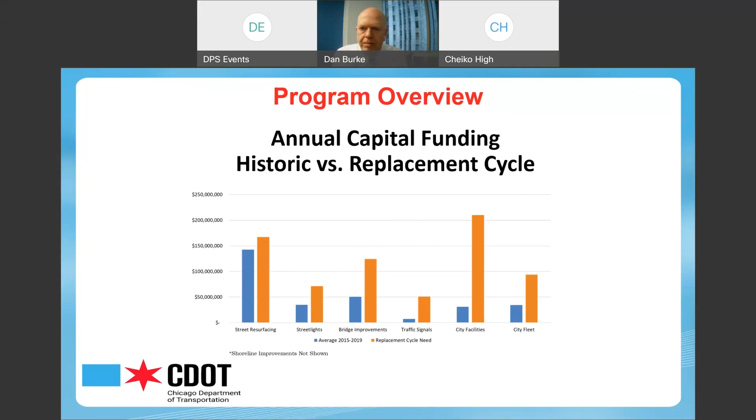Program overview: on a high level, this is the cost, the orange is the cost of what the expenditures need to be to maintain all of our assets. You pick the category: street resurfacing, street lights, bridge improvements, traffic signals, city facilities, or city fleet. The blue has been the city expenditures from 2015 to 2019. So you can see really quickly we were underspending in a whole lot of categories. But I'm really happy to say there's been a lot of movement on that front.

The Chicago Works $4.4 billion infrastructure bill: the first $1.4 billion of that bill passed City Council in November of 2021. I can't say enough about the leadership of Mayor Lightfoot taking that bill through council in the middle of a pandemic to address these issues and to enable us to do our jobs and really address some of these longstanding funding deficiencies.

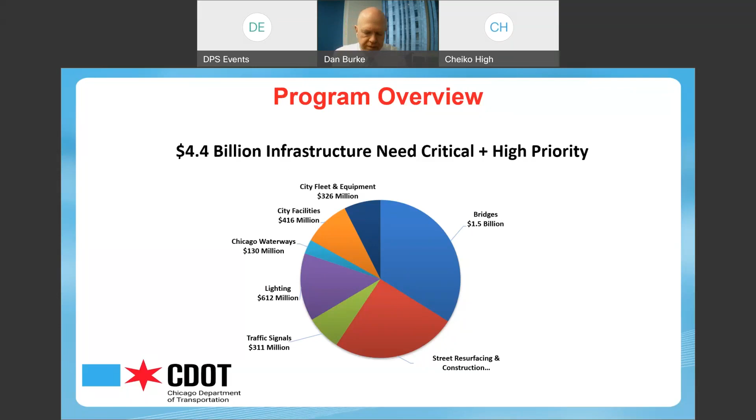The new 5-year Chicago Works plan is a $3.7 billion plan with $1.4 billion approved for years 1 and 2. It's need-based, data-driven infrastructure, facilities, fleet management — not just CDOT, but we're a big portion of it. We're also putting a lot of emphasis on economic development and neighborhood revitalization, and also modernization, maintenance, and future-proofing things.

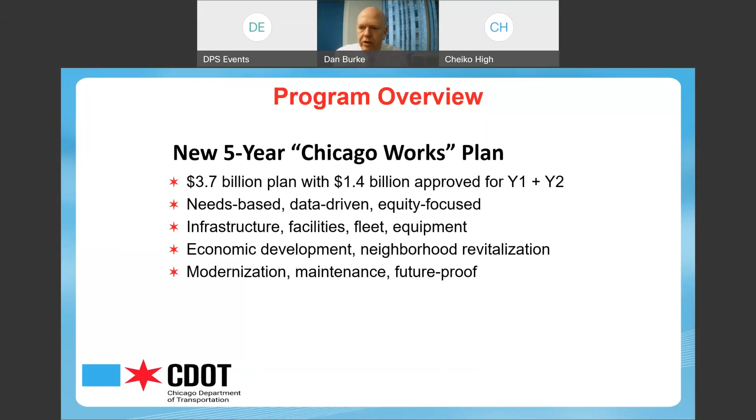Contracting opportunities, I think we're all here today to hear about: street reconstruction and resurfacing, transit, streetscapes, bridge reconstruction, engineering services, whether planning, design, or construction management.

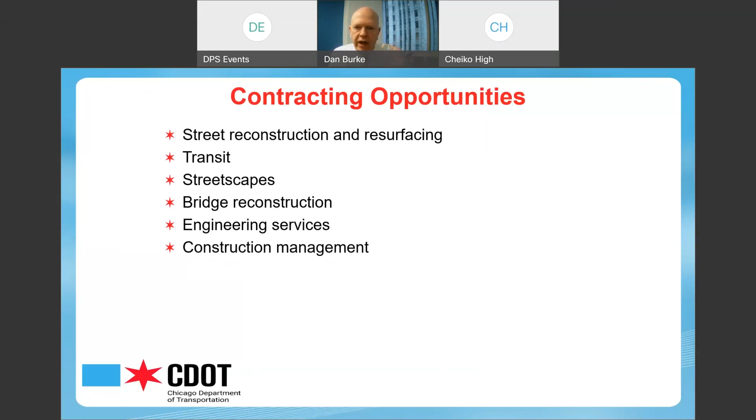At this point, let me turn it over to Deputy Commissioner Cheiko High, and she's going to talk about one of the very exciting ongoing projects we have going on. Good morning everyone. As Dan said, my name is Cheiko High, and I'm Deputy Commissioner for the Division of Administration for CDOT. So what I'm going to talk about is the Jackson Park transportation improvements to support the Obama Presidential Center.

Just for common language, when we say Obama Presidential Center, that's the actual building. The type of work that CDOT will be doing in Jackson Park will be transportation improvements that surround Jackson Park to support the Obama Presidential Center.

Some of the project highlights for the Jackson Park Transportation Improvement Project include Stony Island between 64th and 59th — we'll be widening and reconstructing that stretch. We'll also do some improvements on DuSable Lake Shore Drive between Hayes Drive and 57th, widening that as well. Another improvement will be Hayes Drive from Stony Island to Lake Shore Drive.

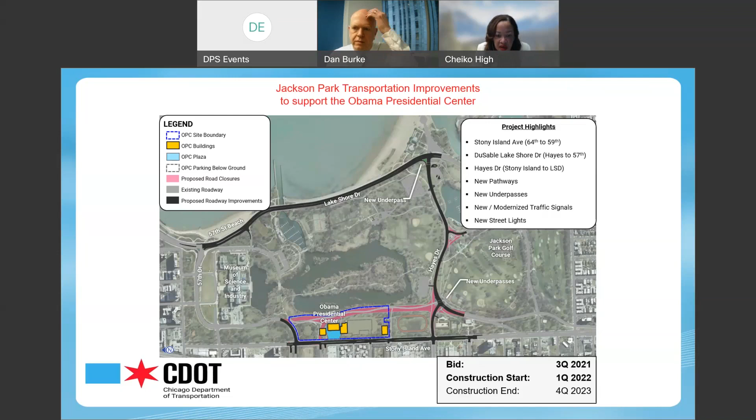This project did not take a quick route. It took us about 5 years to make sure we got this contract tight when it comes to workforce, contracting opportunities, and partnerships. Our partnerships include the Park District and, of course, the Illinois Department of Transportation. So this was a collaborative effort for all entities.

The scope of this project — safety is always first. So we're going to have components of safety, not only with traffic signals, but also roadways and pedestrian safety, bike safety, things of that nature.

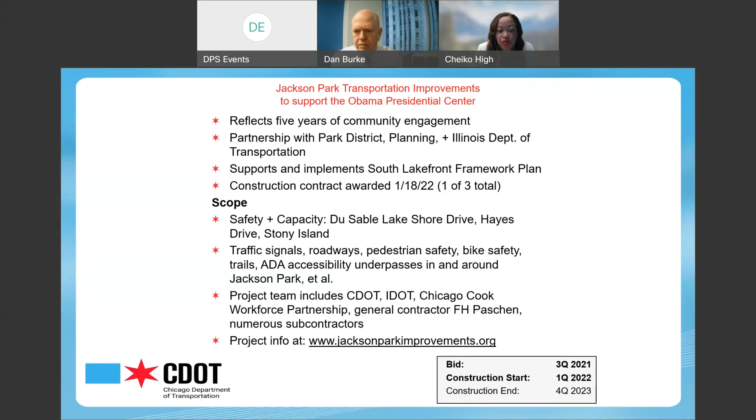One of our closest partnerships to make this opportunity what it is today is working with the Chicago Cook Workforce Partnership, between what we call the Partnership and FH Paschen. We really want to make sure that we meet or beat our contracting percentages for this job. You can find out more information about this job at our website, jacksonparkimprovements.org. Next slide.

Specifically, we're going to take a deep dive on what we really did different and better on this job when it comes to workforce and contracting goals.

To get it done, we're going to work with our general contractor, FH Paschen, along with the Chicago Cook Workforce Partnership, to identify tradespeople who are able to produce on this job and who are qualified.

As far as our MBE and WBE numbers, it's the highest ever: 30% will be MBE, 7% will be WBE, and 1% will be BBE. We'll be working with the partnership and FH Paschen, as well as the Obama Presidential Center, to host community events so we can hire for these jobs.

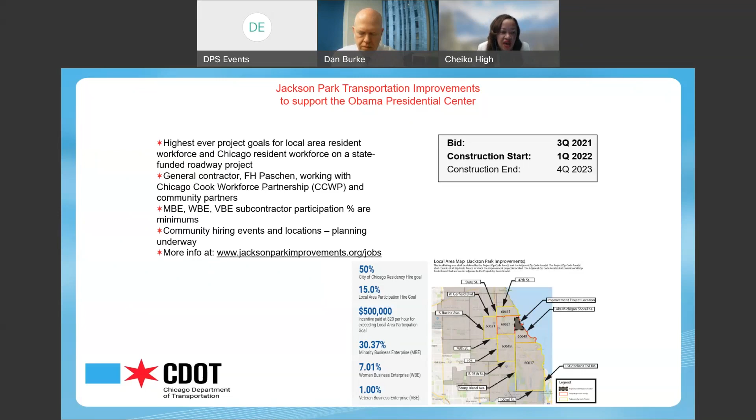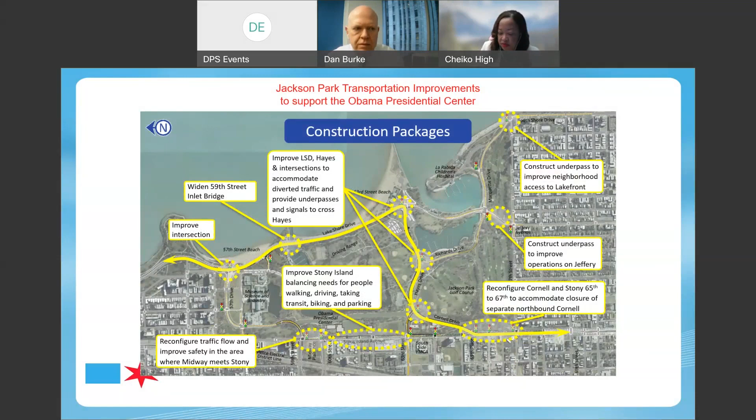Next slide. So with this, if you hit the button one more time, it will highlight bid package 1. Package 1 was already awarded to FH Paschen.

Package 2, which I think is the opportunity most of you are here today to hear about, will be construction south of 64th Street in 2023. The final package, package 3, will be in 2025.

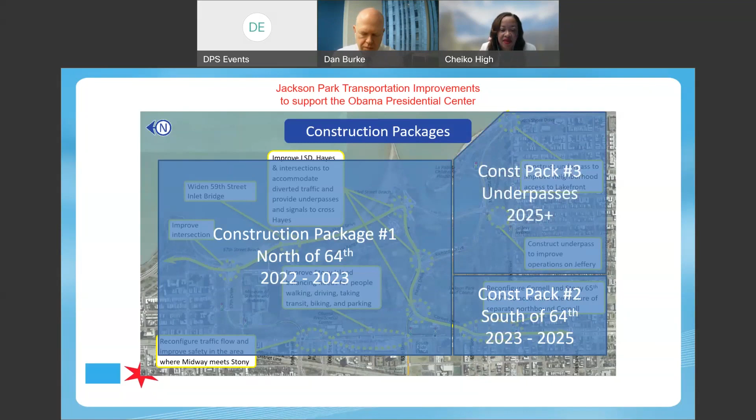Next slide. This is an aerial view of Jackson Park, and this is basically the work area that CDOT will be improving throughout the Jackson Park area.

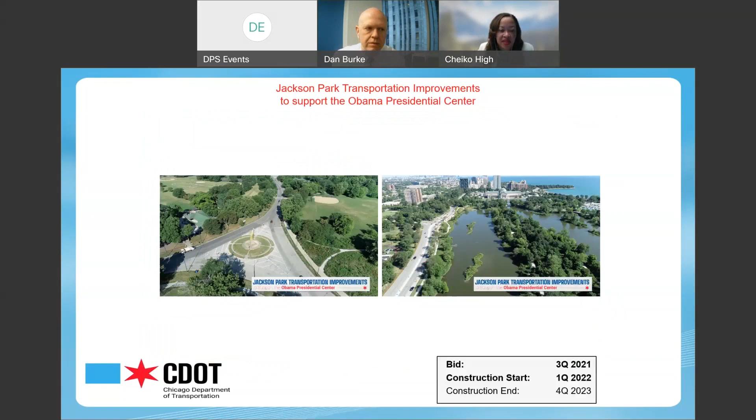Next slide. Thanks, Cheiko. Yeah, a lot of exciting things happening in Jackson Park to support the transportation improvements for the Obama Presidential Center.

So, back to some of the work we have coming out this year. We're really excited about our 2022 arterial resurfacing program: 37.2 miles of roadways in 4 contracts. We anticipate bidding those contracts late Q2 of this year, with construction starting in the 3rd quarter and ending 2nd quarter in 2023.

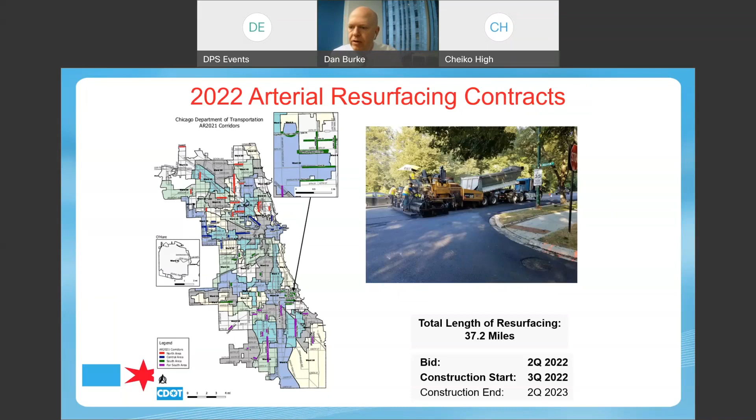Again, as usual, it will be split into 4 zones: north city limits to North Avenue, North Avenue to Cermak, Cermak to 79th, and 79th south to the city limits. Look for those again, hoping to get those on the street soon.

Milwaukee Avenue, Section 5, Logan Boulevard to Belmont. This is an exciting street reconstruction and streetscape project with a lot of community involvement and input.

We're seeing a real redo and reactivation of Logan Square and the Monument area. We're looking to get this project out to bid 3rd quarter of this year, with a 2-year construction schedule.

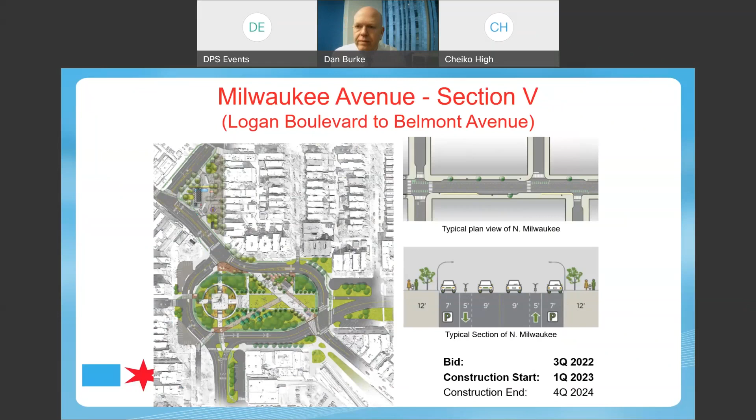Lake Street, Ashland Avenue to Halsted. This is a complete reconstruction of the full Lake Street right-of-way. I believe this is the eastmost and final segment of this project. We're excited to finally get this one out to bid and going. Look for this to be bid 4th quarter of this year.

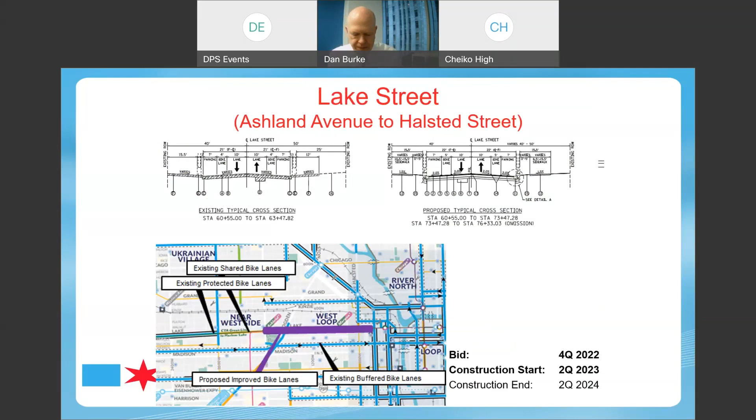Grand Avenue, Damen Avenue to Ogden Avenue, will be bid. I believe this is also the final segment of the Grand Avenue reconstructions. It's 1.0 mile in length, a complete reconstruction of the full width of the right-of-way, with a lot of architectural enhancements, lighting, traffic signals, and street reconstruction. Look for that third quarter of this year.

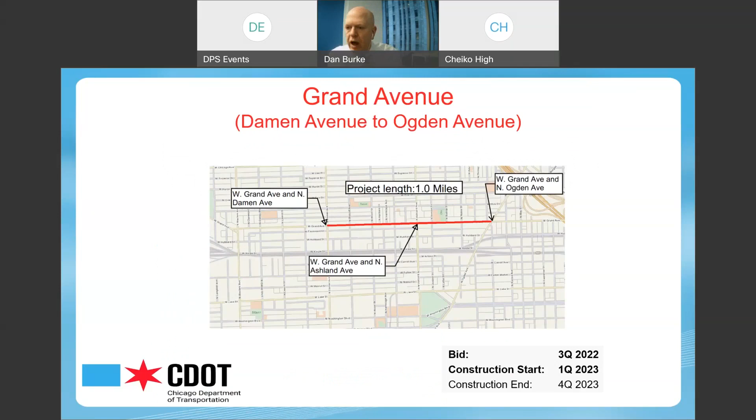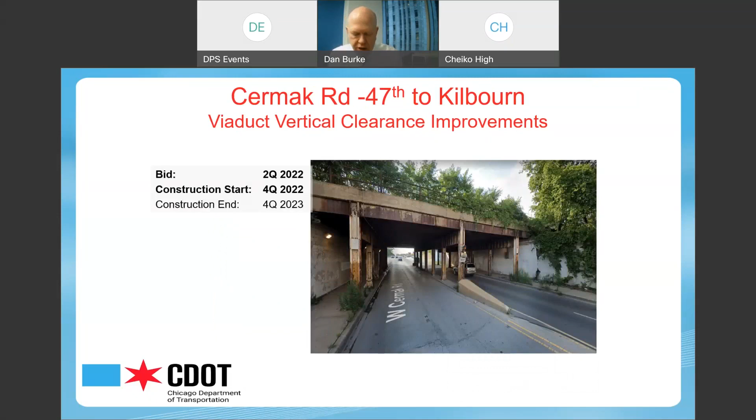On the transit side, State Lake Elevated Station. This is a new signature station at the corner of State and Lake Street on the loop elevated system. This was designed by TranSystems and SOM for the Chicago Department of Transportation, in cooperation with the Chicago Transit Authority. Right now we are piecing together funding and looking to have this out to bid fourth quarter of this year, with construction start second quarter in 2023 and a 2-year construction schedule on that.

It's going to be a transformational project. That existing station there, as many of you may know, dates from the 1890s. The platforms are only 7 foot in width. It's the second busiest station on the CTA system. This is going to be a complete replacement of that station with a really exciting modern 21st century transit facility.

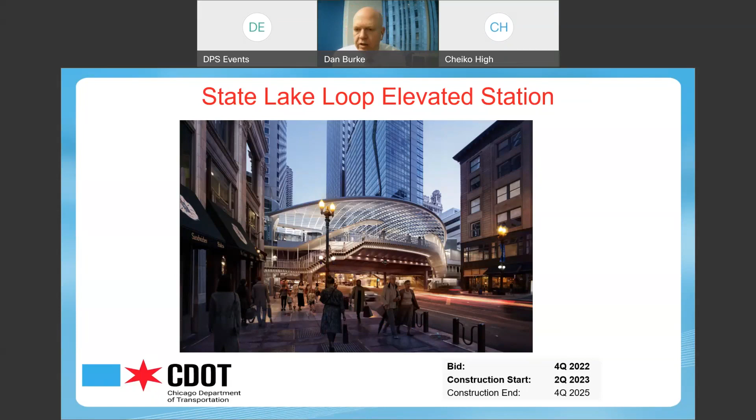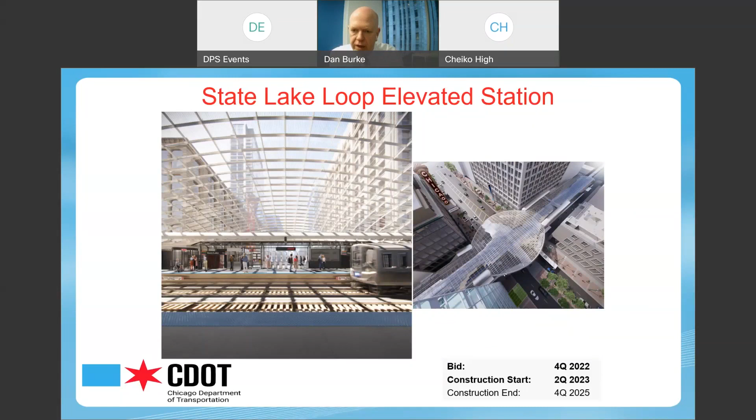Just some more renderings and concepts on that, what it's going to look like. It's going to have a domed glass enclosure, with a lot of beautiful new state-of-the-art amenities, and it's going to change the dynamic of that corridor as well. We worked very closely with the State Street Council and all the surrounding businesses on putting together this plan and building a coalition around it.

Streetscapes. A lot of streetscapes coming out this year. We're excited to be putting these on the streets. This is Lubica Benick in our project development group, and she's extremely busy this year. These are the neighborhood type improvements that bring reconstructions of primarily business districts, the public way within business districts, and really activate and create great public spaces for people to use and to support those area businesses.

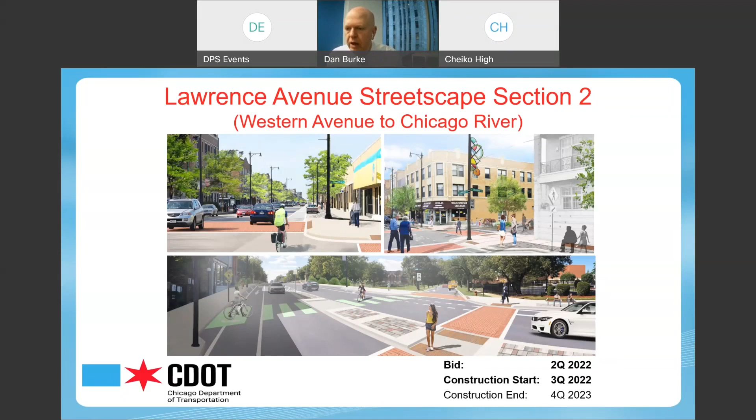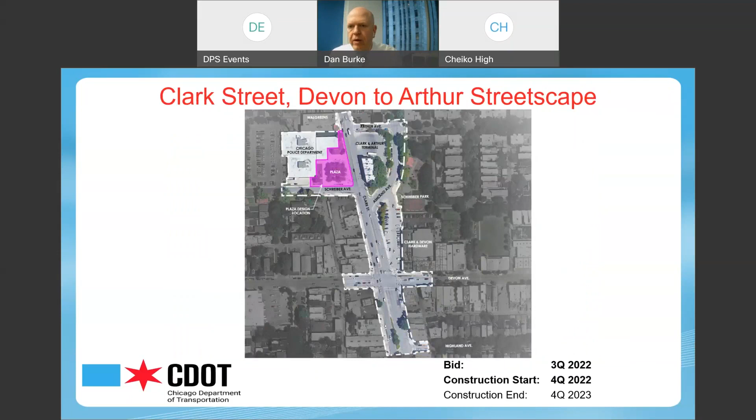This one at Lawrence Avenue, Western Avenue to Chicago River, we anticipate bidding second quarter of this year, hopefully getting it started late third quarter. Clark Street, Devon to Arthur Street streetscape, another streetscape, looking to go out with that third quarter of this year with a contract award in fourth quarter and a 1 year construction schedule.

111th Street, Homan to Sacramento streetscape, just some exciting things. If you look at the two cross sections between what you have today and what the revised will look like, and just the activation of that space and the architectural enhancements to that community. Looking to put that one on the street second quarter of 2022 with the construction start in third quarter and a 1 year construction schedule on that as well.

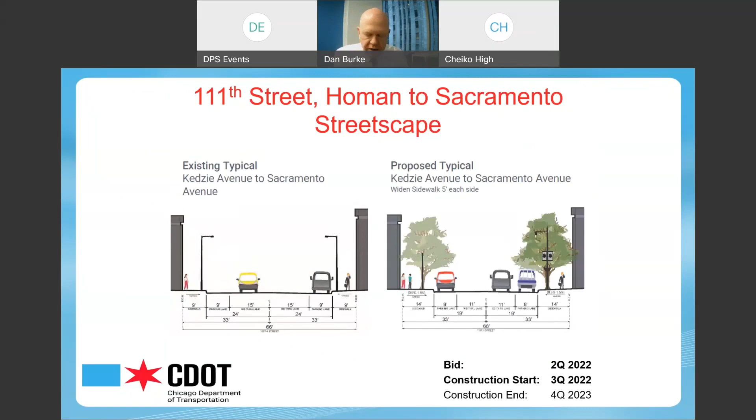Lincoln Avenue Streetscape, Section 1, Catalpa to Foster Avenue. I believe there's 3 segments in this. This is the first of those 3 segments. This will be bid third quarter of 2022 with fourth quarter start and again a 1 year construction schedule.

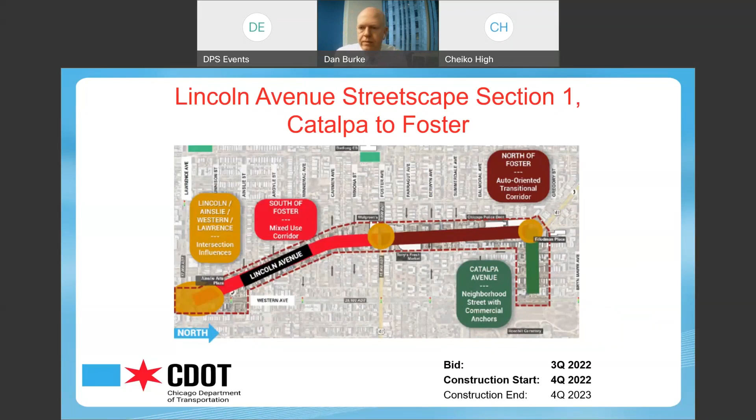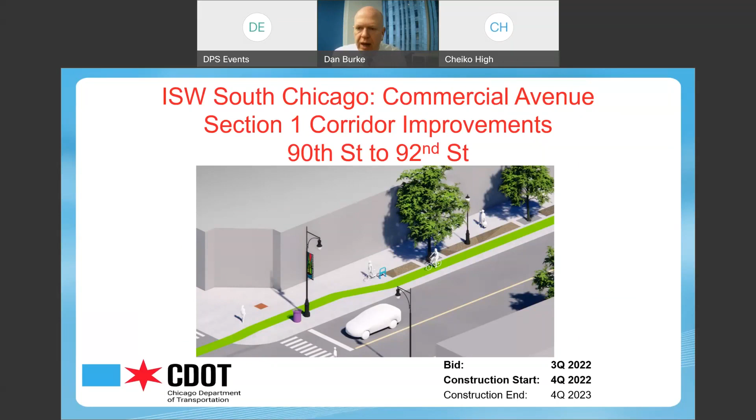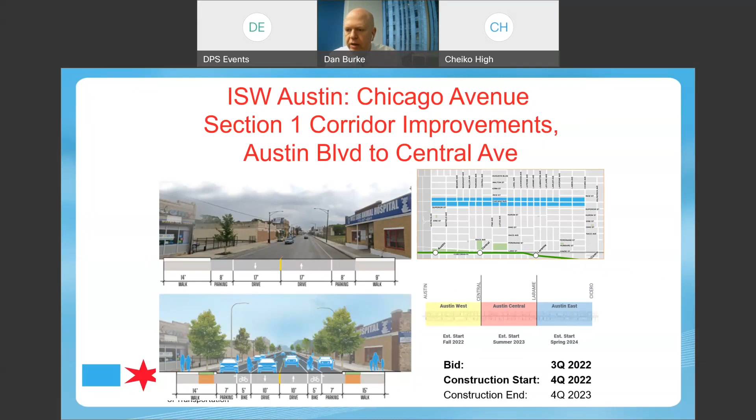Invest South/West Austin, Chicago Avenue, corridor improvements, Austin Boulevard to Central Avenue. There's been a lot of planning process and community input on this as well. We are excited to be bringing this one to fruition. This is the westernmost portion of this project, and we anticipate bidding it late third quarter of this year.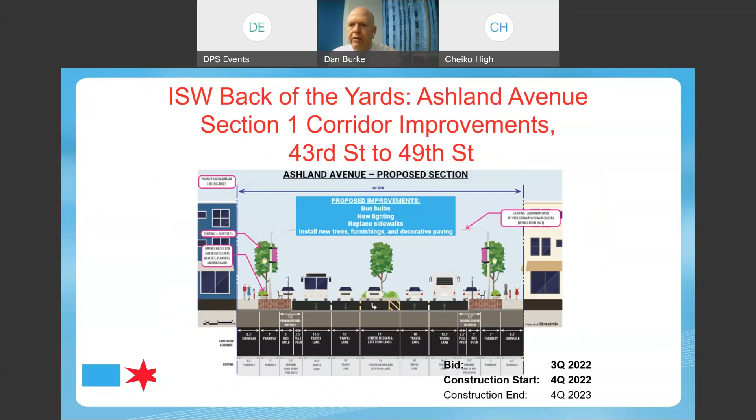Invest South/West Back of the Yards, Ashland Avenue, Section 1, corridor improvements, 43rd to 49th Streets. As you look at that cross section of Ashland Avenue, you can see it's really a very ambitious and sort of game-changing streetscape with a lot of architectural enhancements and placemaking and really changing the whole dynamic of that corridor. Look for that to be bid third quarter of this year.

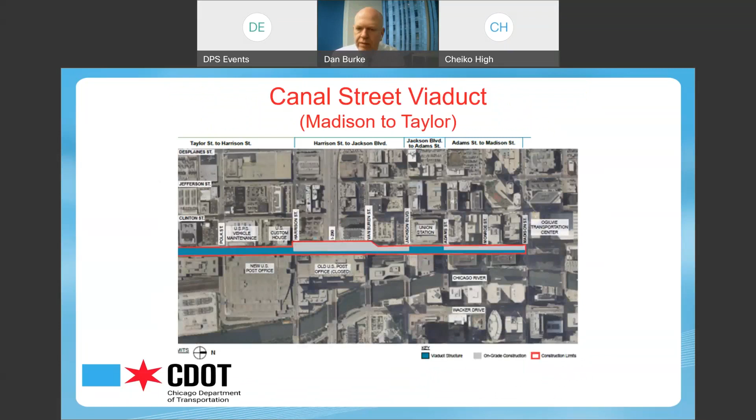Bridge reconstructions. Canal Street Viaduct, Madison to Taylor. Madison to Taylor actually comprises 4 sections of Canal Street that will be bid this year successively. This is a division of those. A lot of people may not realize, but Canal Street is a viaduct. It is over the westernmost track of Union Station, both on the north train shed and the south train shed. Those tracks extend out to almost the midpoint of Canal Street.

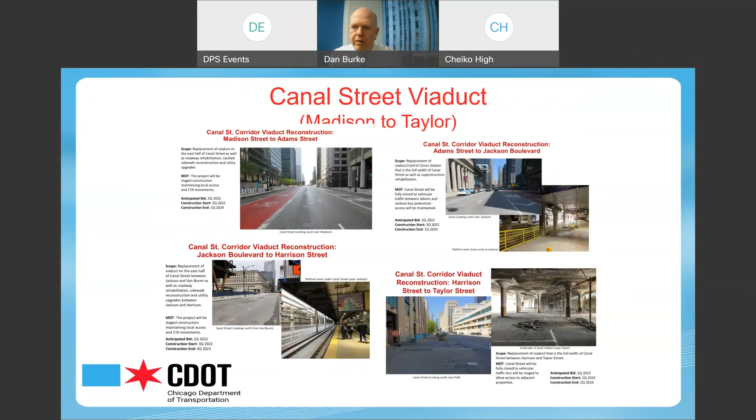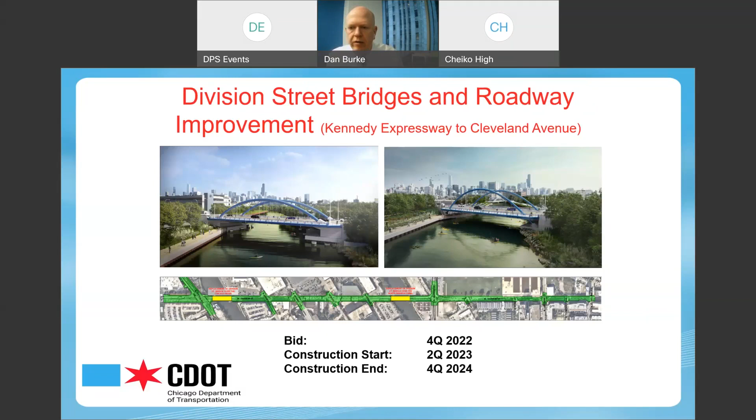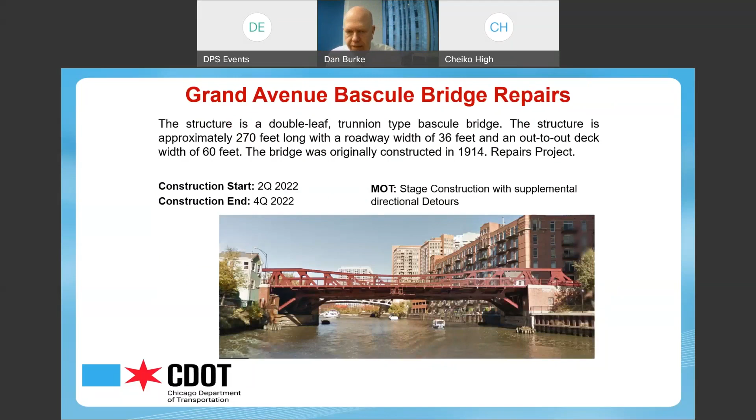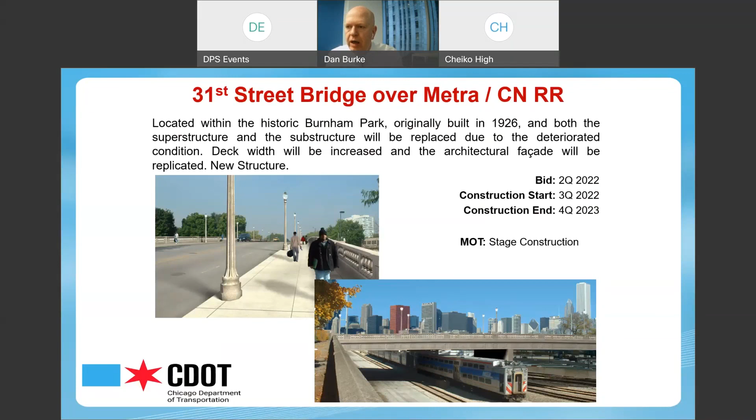31st Street Bridge over Metra CN Railroads, located in the historic Burnham Park and originally built in 1926. Both superstructure and substructure will be replaced as part of this, deck width will be increased, and the architectural facade will be replicated on a new structure. This one is all ready to go. We're just dotting the I's and crossing the T's, hoping to see this on the street in a couple weeks here, and if things go well, we'll look to have that construction contract awarded third quarter of this year and construction end fourth quarter of 2023.

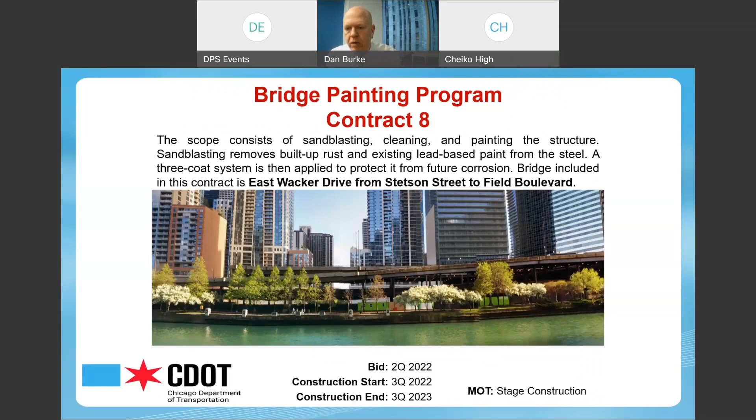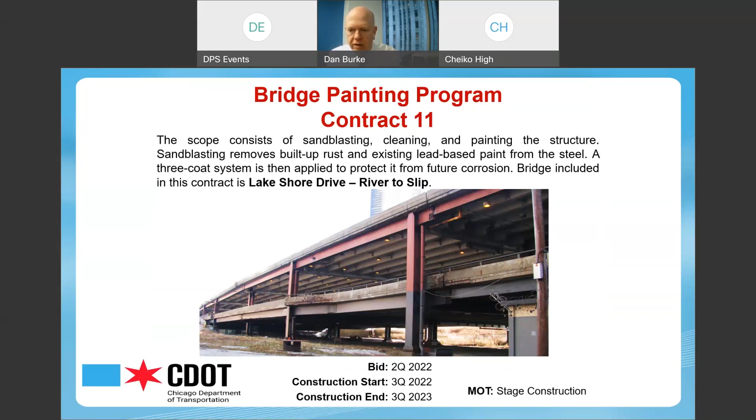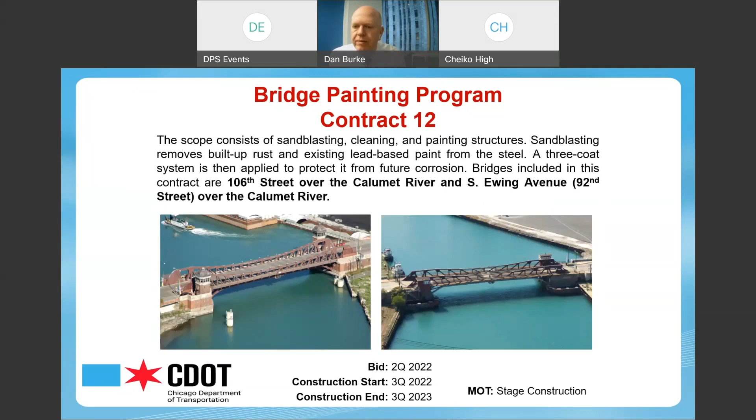Bridge painting contract 11. Not sure why they jump around the numbers on this, but I'm sure there's a good reason. But this is Lake Shore Drive from the river to the slip. This will be bid second quarter as well with a construction start in third quarter. Bridge painting contract 12. More bridge painting, we're looking to get 106th Street over the Calumet River and South Ewing Avenue, 92nd Street over the Calumet River will be painted as part of this contract. Bid second quarter this year.

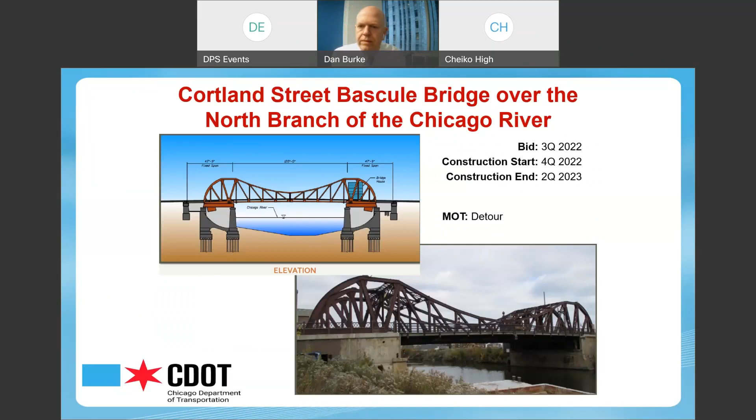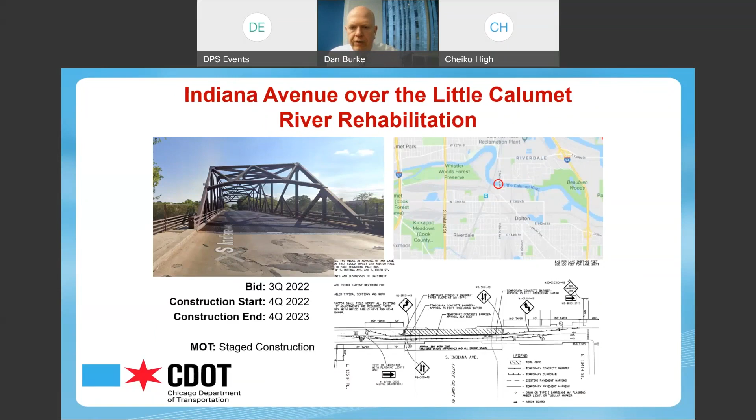Indiana over the Little Calumet River Bridge rehabilitation. Extensive repairs to that structure. Bid third quarter of 2022. Fingers crossed, construction start fourth quarter and construction end in fourth quarter of 2023. Western Avenue over the Sanitary and Ship Canal, just south of 31st Street. This project will bid second quarter this year, and construction end, I think that's a typo, third quarter 20, that should be third quarter 2023.

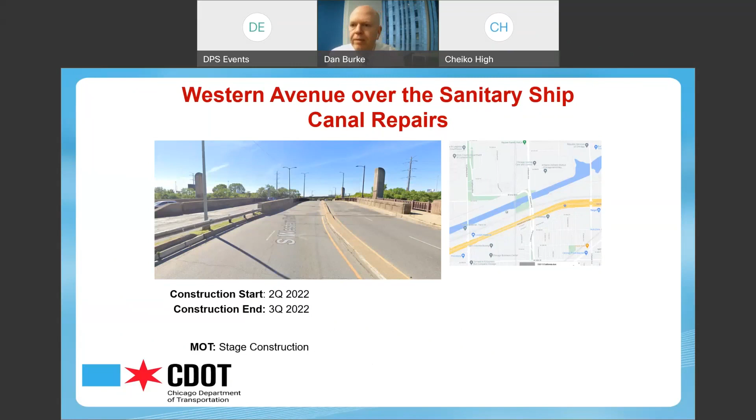Projects that we have out on the street right now: the tunnel inspection and maintenance repair services, bids are due the 25th on that project. So tomorrow, I'm hoping to get some good bids on that. If you're considering that, please sharpen your pencils and get us some good numbers. Fullerton Avenue improvements, this is essentially streetscape, street reconstruction from Narragansett to Lockwood. Bids are due there on March 28th. And then Grand Avenue bridge repairs were due today, but that bid date has been extended.

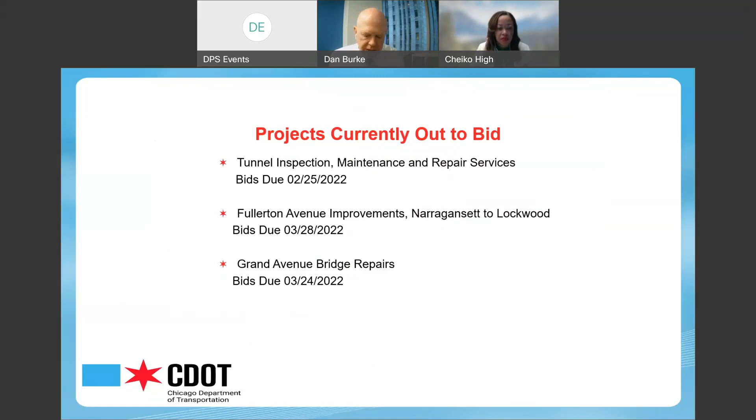At this point, I'll turn it over to Deputy Commissioner Cheiko High. Thank you, Dan. As you can see, CDOT has a whole lot of work out there, and I want to take the opportunity to also share with you all that for the first time ever, CDOT has target market DURs out there. Under the category for design, we have a total of 21 contracts that were awarded.

And I'm sure all of you know what the target market is. It's made up of a pool of only MBE and WBE firms. So again, for the Department of Transportation, we have a total of 21 DURs for design. And we also have a total of 20 target market contracts for construction management. To date, close to $60 million has been issued in task orders for design DURs, and a little over $30 million has been awarded under the target market DURs for construction management.

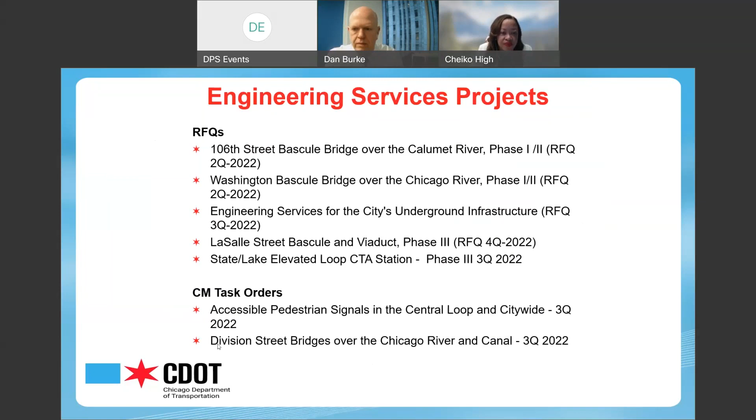Next slide. I think that should be.

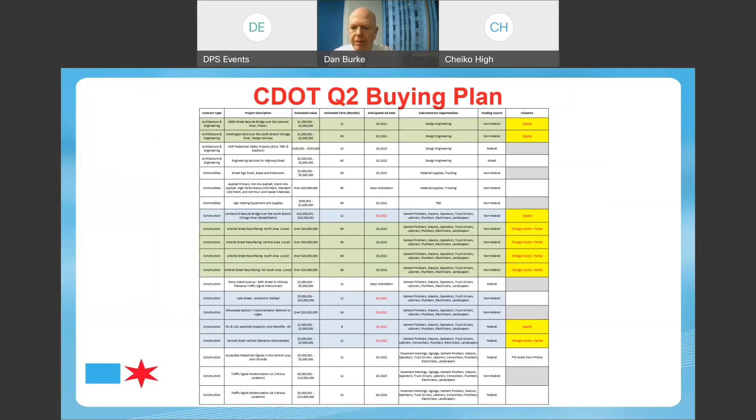Thank you, Cheiko. We mentioned a lot of projects here. Admittedly, things do change as these progress. So I just wanted to tell you all, please check the CDOT buying plan. It's on the Department of Procurement Services website. Please make that a link on your computer and check it regularly. Everything we do goes up on here. Cheiko and her team are very good about getting updates from the project managers and from the Department of Procurement Services and making sure those are reflected.

This is the latest and greatest information, so please, if you're interested in pursuing our work, get this link, check in and watch it regularly. This is just the second page of it, and you see everything we talked about and a lot more is on here.